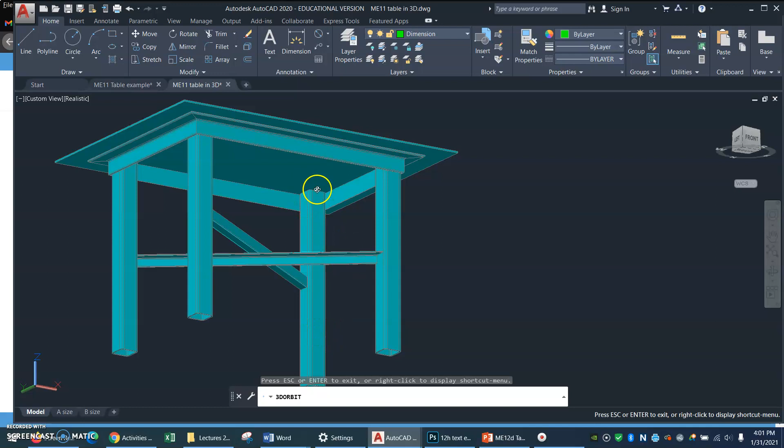Then, from this angle you can see where these square tube legs hit the tabletop. You probably want a weld there attaching the leg to the tabletop. The thing is, though, you can't do a weld all around, can you? Because on the outside two sides of that tube, there's an angle iron frame going around. So it's just the two inside faces of the tube that you would fillet weld.

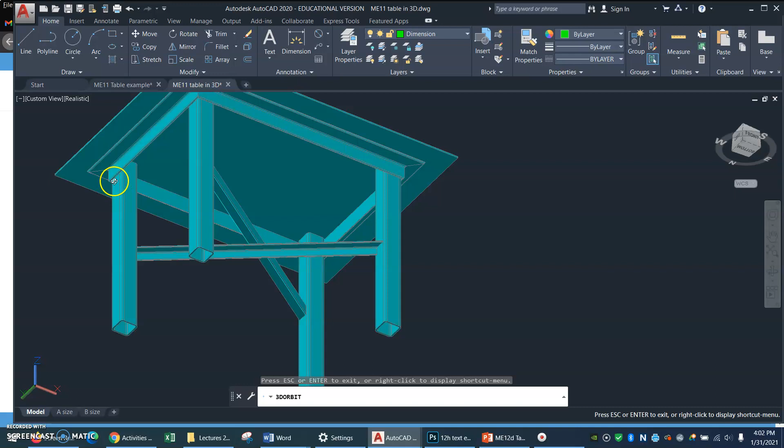But you might want to weld the angle iron frame where it lands on the tube on these two sides, there, and so forth. Now, how about that angle iron frame? In each corner, there's a 45-degree angle. It's been cut at 45 degrees so that those pieces can fit together. What do you want to do there? Do you want some kind of groove weld sticking those edges together?

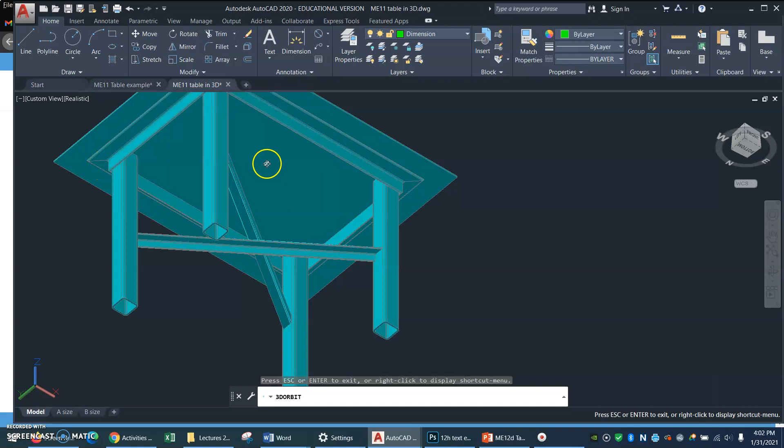And then what else? Those two smaller braces, these little guys, that weld into the sides of the legs, you probably want some kind of small fillet weld, maybe an all-around, going around the ends of those angles. And you can decide whether or not you want the two angle iron braces to be welded together somehow in the middle. So those are all things to think about.

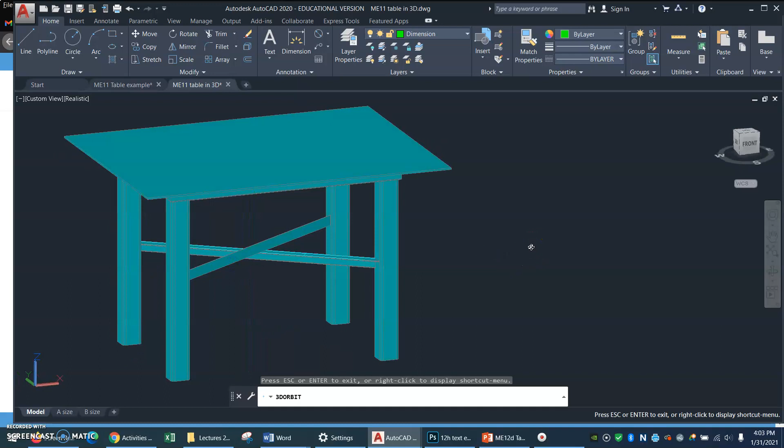Now I have a couple of scribbly examples for you. We'll look at these. And when I say scribbly, I am not kidding. So I sketched out the bottom view of this table on a whiteboard with some markers. And then, and this was a year or two ago, another class did this table assignment, and we were meeting in person at that time. So we brainstormed, what kinds of welds might you use?

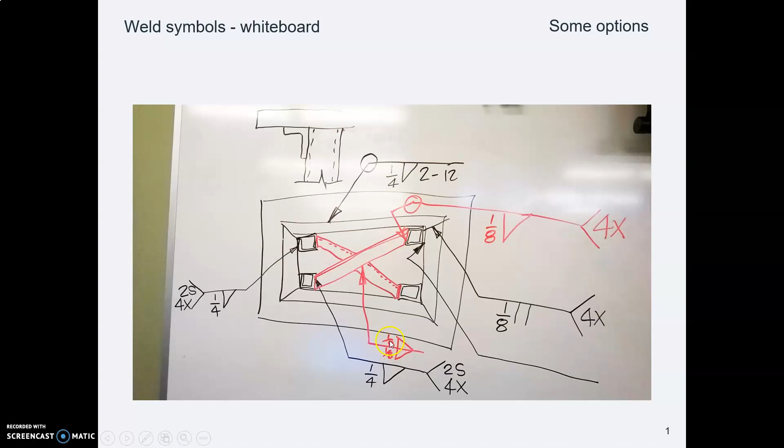Now, some people in this conversation thought we should weld these 2 braces together where they cross to prevent the thing from flexing and moving around. It's thin angle iron, and if you weld on both sides, 3/4 of 3/16 is a little more than 1/8, but 1/8 would be fine. And there's a fillet weld symbol saying fillet on both sides, arrow side and far side. This group didn't think that was necessary, so they did not put fillet welds in there.

Now, let me just say that these are all options. And if you want to do things that are different from either of these scribbly pictures, that is totally fine too. You are the drafter. It is up to you to pick what weld symbols you would like to draw. As long as they match the kind of shape that we've got here, it will be fine. So put whatever symbols you prefer on your drawing.

These symbols, you just draw lines and write text. I do not know of a better way to do it. Just make the line, just write the text, and that's it. And in one of these handouts, I gave you a handout that lists the AWS sizes for each of these symbols.